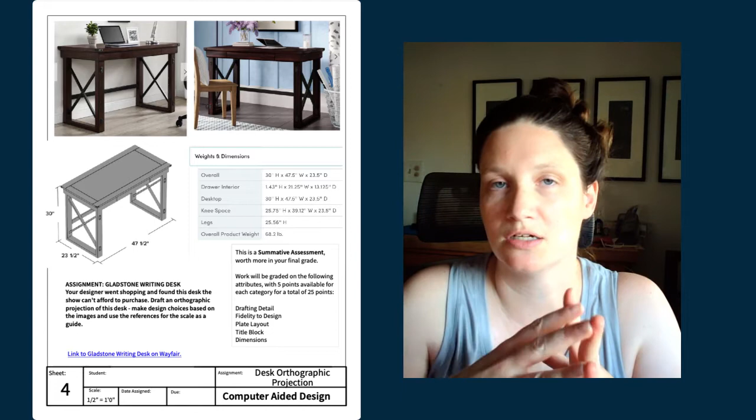In this project, you're going to demonstrate all of these 2D drawing skills you've been working on. You're then going to plate this assignment onto a sheet for print and include dimensions the way we have done before in previous hand drafting classes. I'll refer you to a previous video about what orthographic projection is and how it works, in case that's something you've forgotten or aren't 100% clear on. That is foundational knowledge we are assuming when we go into this project.

Our first task is to take a look at this assignment sheet. I've made you a little once-upon-a-time for this project: assignment, Gladstone writing desk. Once upon a time, your designer went shopping and found this desk. The show can't afford it for props, but they're going to want you to build it in the shop. So your task, as the technical director or props designer on the show, would be to draft an orthographic projection of this desk so the shop can build it, making design choices that allow us to create a desk that looks just like the one in the picture.

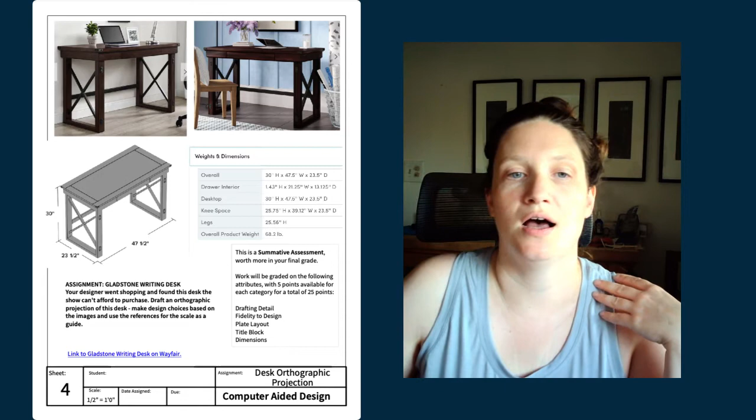Using the basic information provided on this assignment sheet, you should have a hard copy of this; if not, there's a digital copy in the learning management system. Some of the given information includes the overall dimensions of the piece, the size of the desktop, how much knee space there is, how tall the legs are, and overall product weight, which we don't really care about. So we have some basic dimensions, and we also have this little 3D sketch to help us get more clarity about the construction of the desk.

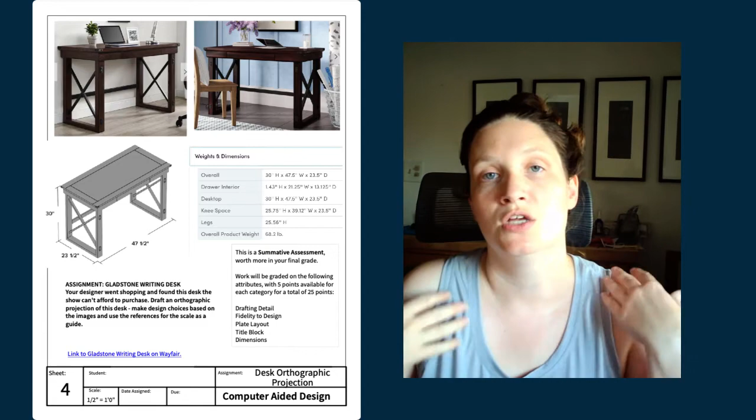What I'm going to have you do is take that information and turn it into an orthographic projection with three views: a top view, a front view, and a side view, so we can send it over to a carpenter in the shop and they can build it.

I want to point out the rubric categories for this assignment. I'll be grading on drafting detail, how thorough you are in the detail of the piece; fidelity to the design, how close it would come out relative to the project design; how you lay out your plates on your print layout, meaning aligning your top view, front view, and side view the way we did in hand drafting; whether your title block is complete; and your dimensions as you add them to the final layout. That's what you're graded on for this assignment.

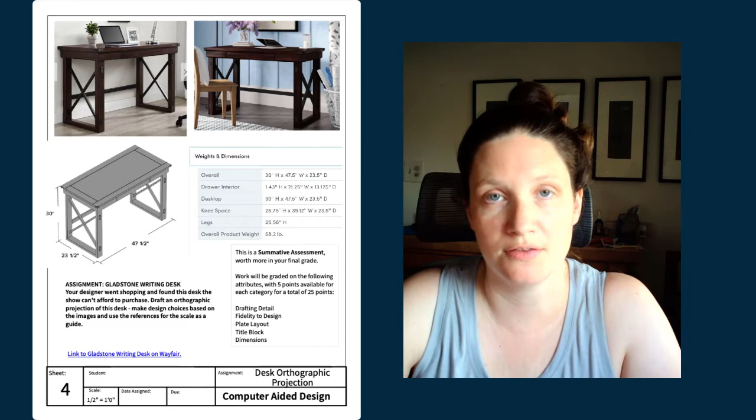Let's get started, okay?

Back in Vectorworks, let's get all up in there. Let me make sure I have all my windows inside of the bounding box. Here we are in Vectorworks, we're going to start a new file once again, use our template, click OK, get it started. Immediately we're going to save it so we know we're getting our backups. Let's call this Bartenstein, 2D desk, because you'll be doing a 3D version of this later. Okay, got a nice blank sheet. Make sure I'm on that scenery layer, and I am. You can also see that over here in this top drop-down, that's our scenery layer.

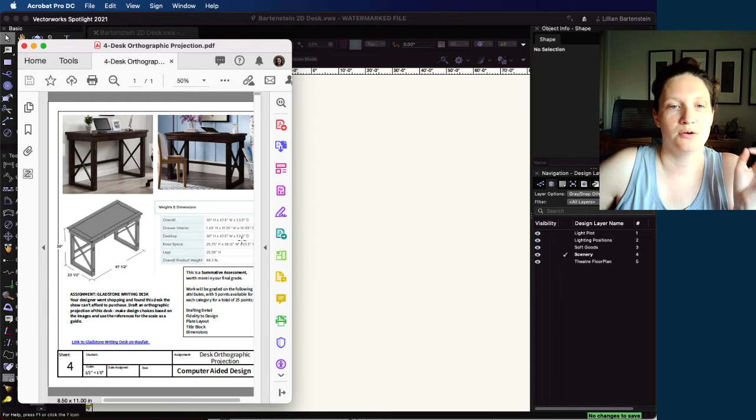As I look at this desk, I'm going to pull it into the frame so we can be on the same page and point at some things. The first thing I'm going to do is my top view, which is pretty easy because I have dimensions given for that desktop: it's 30 inches high, 47.5 inches wide, and 23.5 inches deep. So for the top view, it's a rectangle that would be 47.5 by 23.5.

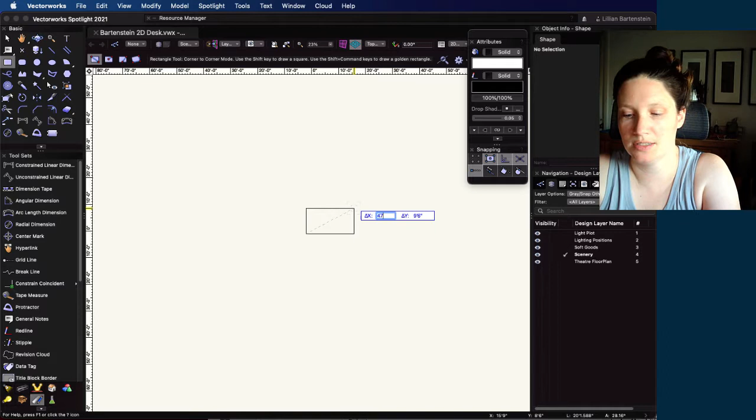So I'm going to start with that rectangle. I pick up my rectangle tool - you can also click the 4 in order to grab that tool. I like to make sure I'm close to the 0, 0, and then let's type that in. So my numbers were 47.5, hit tab, and 23.5, tab. Okay, so I'm obviously very far away.

We're going to click to lock that in, and now I have my top view of the desk. When you do it, you'll probably pull in some of these details, put some of those top edges in, but for expedience we're going to skip that. You can do that on your final project when you do this assignment.

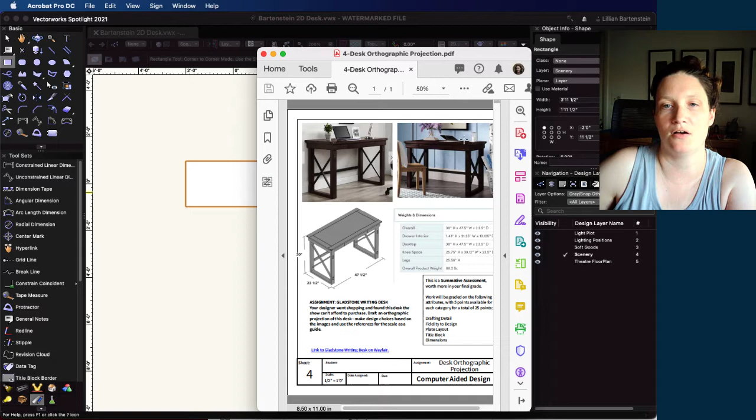So my next task is going to be to do a front view of this desk. I want to look at this front face and try and get all of these details together. So the way I'm going to start that project is I'm going to make the rectangle that this front view is going to fit in.

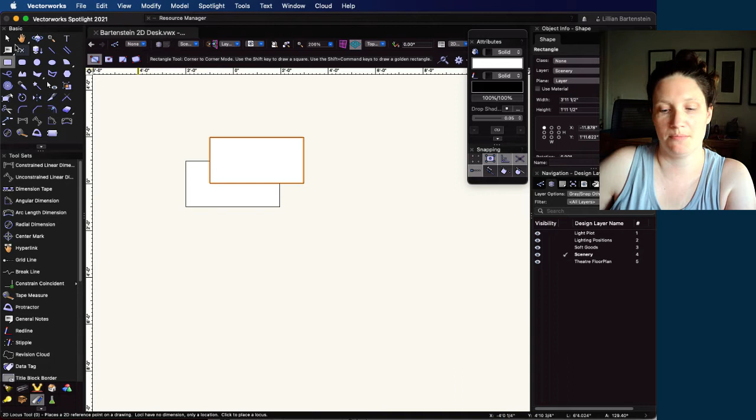Let's start then by duplicating my existing rectangle, Command D, picking up my X key so I'm out in space, and then doing very much what we did before when we were hand drafting, where I align it and then I'm going to move it. This is a new keyboard shortcut for you, Command M. It allows you to move a selection by Cartesian offset, which is super useful.

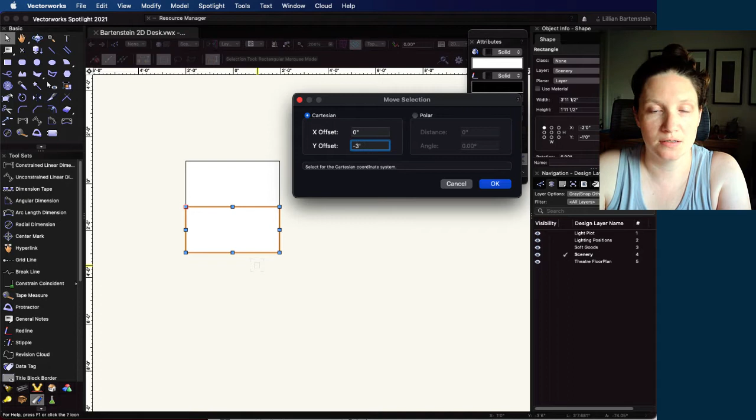So I want to leave the X where it is, I want to change the Y. Let's move it down like 3 feet, okay, give myself some space to work with. And then I'm going to actually adjust the height to be the height of the desk, which is 30 inches. You'll see that in here, right? 30 inches is the total height.

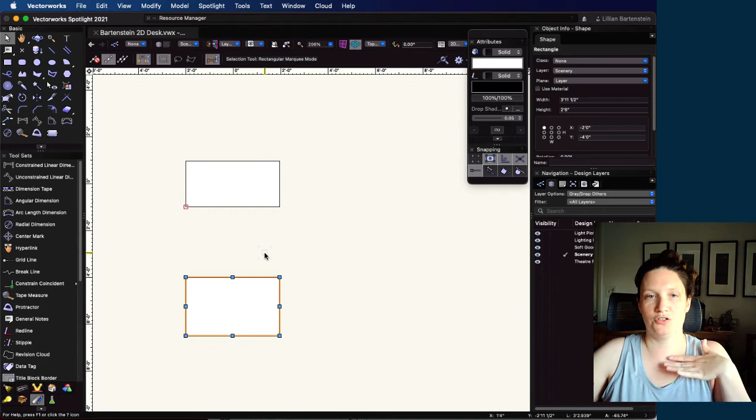That would be the height of this exterior rectangle that we're just using as a guide right now. So I can do that in object info over here. So my width is still that, my height, I can say 30 inches and hit enter, and now this is the height matched to the total height of the desk, okay?

So the next thing I want to do is start putting in some of these details. I'm just going to be doing estimates, you do you, in terms of drafting this front elevation. So I'm going to start with the desk top.

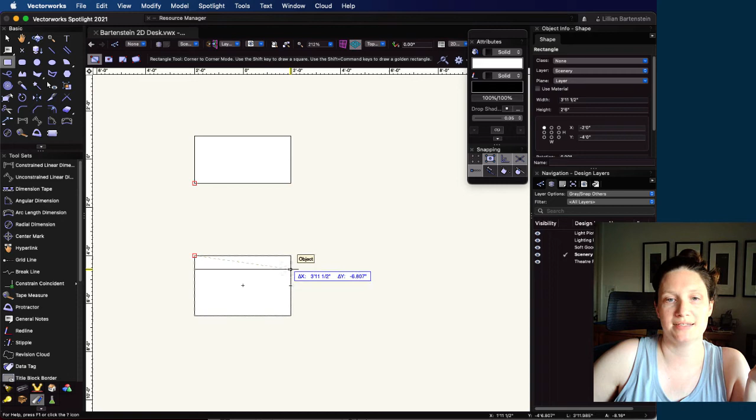I clicked into this corner with my rectangle tool. I now can snap to the object - that'll give me the X, and then I can type in a Y. I don't think that desktop is more than 2 inches thick, so I might say -2 inches, enter, click. So there's that desktop. It looks like then the frame is sitting in underneath it by a little bit.

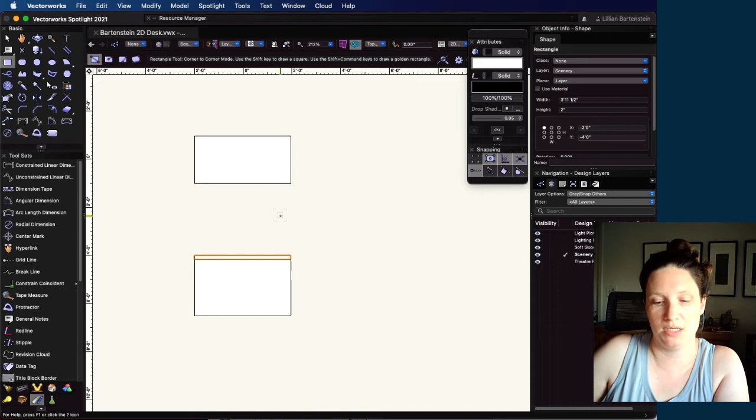So maybe what I would do to get that frame is, again, duplicate, Command D, grab my X key, pick this up by its center point, and then do some adjustments on this shape. So I'm going to come over here again to where it has a width and a height. I know this is going to be a little taller than the thickness of that top desk, so maybe we'll call it 3.5 instead of 2 - actually, maybe just 3 inches is better.

And then I can do something here where I move these little dots - that's your anchor point. If I move this dot to the center option and then I change the width, I can have it automatically shrink inwards to give us that inset under an overhang. So I think I want to just subtract like 1 inch in each direction, and Vectorworks will do that for me. I can just say -2 inches, and now it contracts in underneath. So there we have that overhang is exposed.

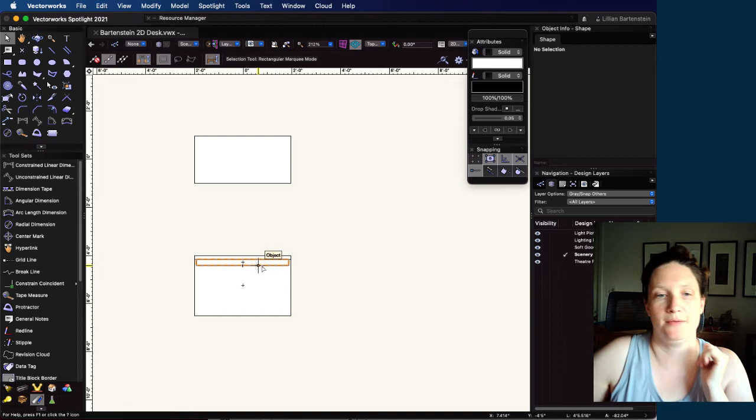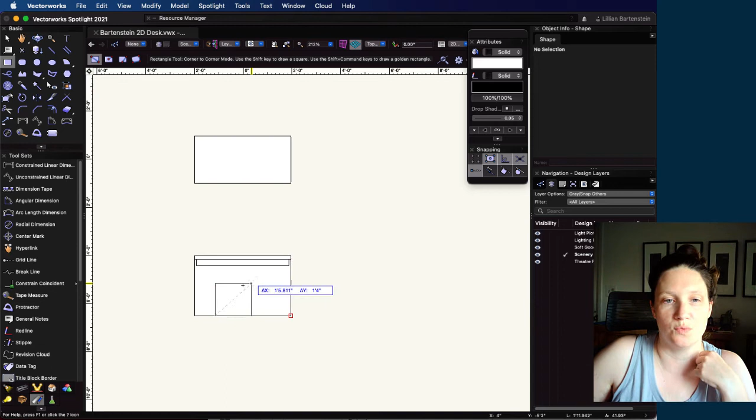You eyeball it, see how you feel about it, see if you feel like the desktop is too thick or this is too small, whatever. If you want to be specific, you can create that rectangle for the knee space, which is 25.75 inches high. So we can do that as well if we want to, where I leave the X like who cares and I say 25.75 - that gives me an accurate knee height. So then you can adjust these rectangles to fit above that knee height if that's something that you're interested in being precise about, which it is. It's a good thing to be precise about.

So then the next thing is this opening, this width underneath.

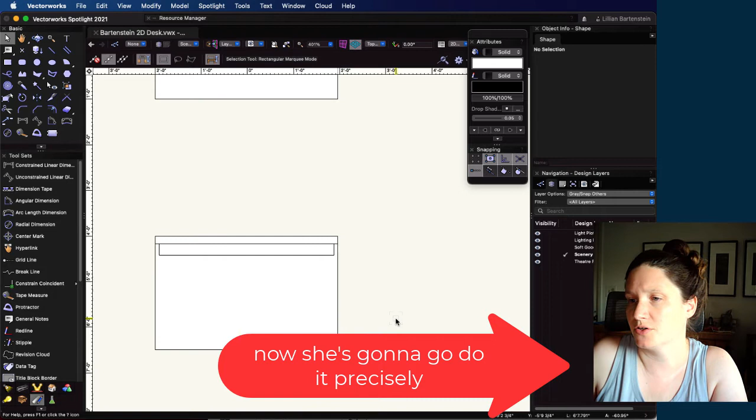Maybe we go with that knee height situation. We can use that knee space measurement to figure out how this all lays out. I'm gonna come back in here, Command Z, get that box back, make it the correct width. The width we're looking for is 39.12, for some reason. Let's see what that looks like.

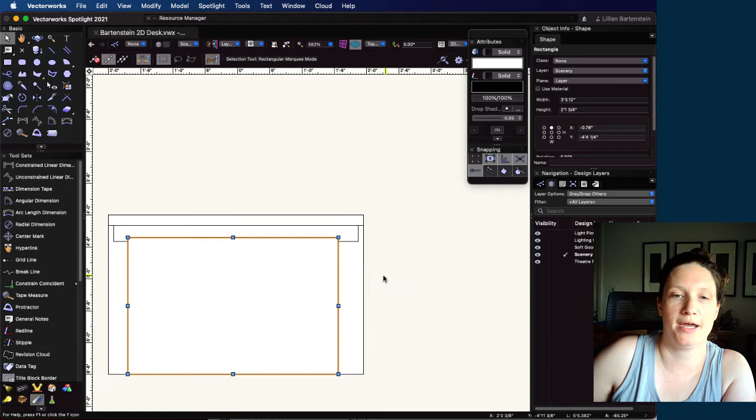So that gives us a good marker. Again, I can pick it up by this bottom center and snap it to the bottom center. Now we know we're symmetrical, and maybe then use these edges as guides. I think I might shrink, let's move this box, make it a little bit narrower, minus a half inch.

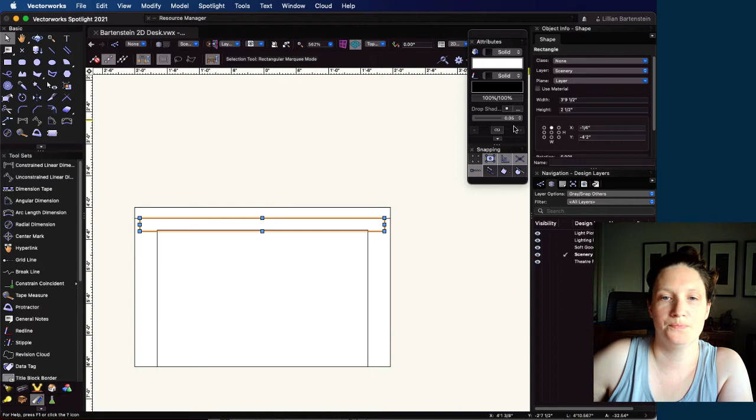Great, and make this distance, let's see what we're looking at here. I'm just using my measuring tool, it's like what, a quarter inch, great. So maybe I'll just make this top one a quarter inch thinner. Then I can nudge this up. I can move, X offset 0, a quarter inch up, and now that knee space is correct.

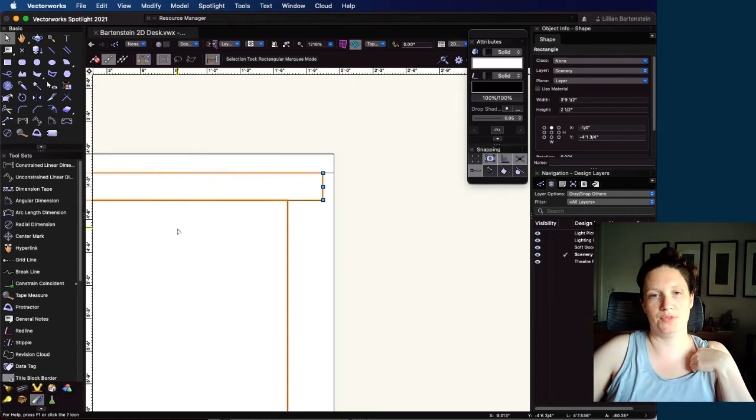Then I can grab a rectangle, pop it in here, get that side piece set up. I'm again gonna highlight over this until it turns red, and I'll be able to snap to that width.

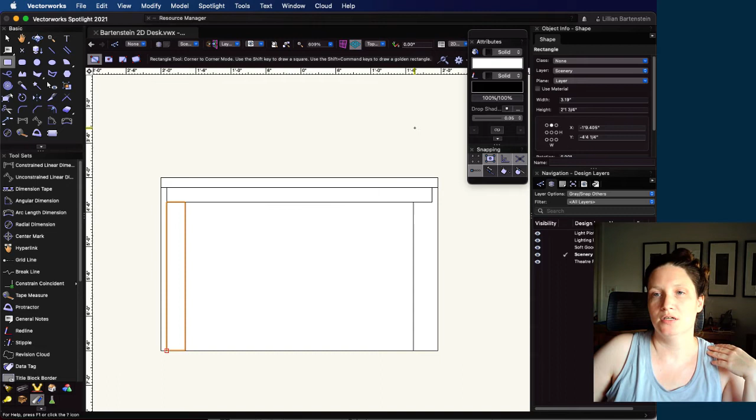I think those legs are actually inset underneath. So instead of this given width of 3.19, I'm gonna just anchor point myself over here, and we're gonna call the width 2.75, or 2 3/4 inches.

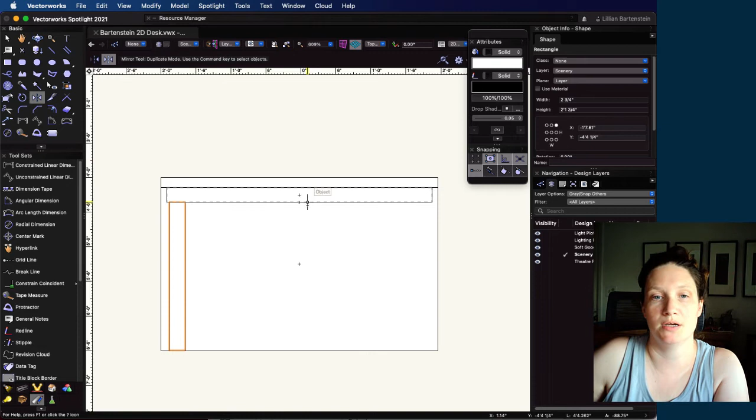I can now delete that. I can mirror this across the center using my mirror tool. Oh, that didn't work. Let me get my mirror tool right.

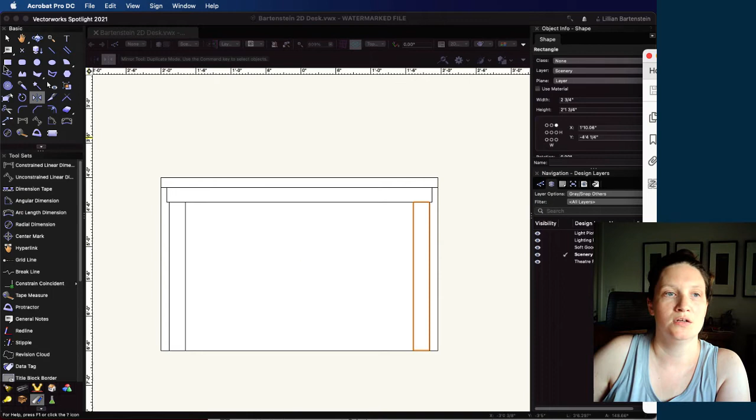Then the only other thing I might see from this front view is this cross piece in the back, so we're gonna see the cross piece going across the very back. If you wanna draw in where that drawer is, you're welcome to do that as well. Let's just give us a rough estimate for where that cross piece is. I think it's a little bit lower than the center, and I'm again snapping to the object, so I don't need to change the X dimension. I'm gonna make this also 2 inches.

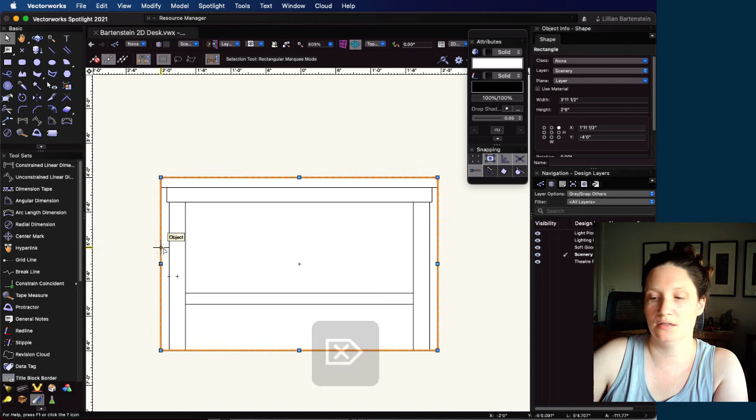So that is now a front view, and I can just delete this bounding box, and I have my front view of my desk. So top view, front view, and then lastly, we'll do a side view. I'm gonna just move this back up like a foot so that I have a little bit more space on my screen. One foot, great.

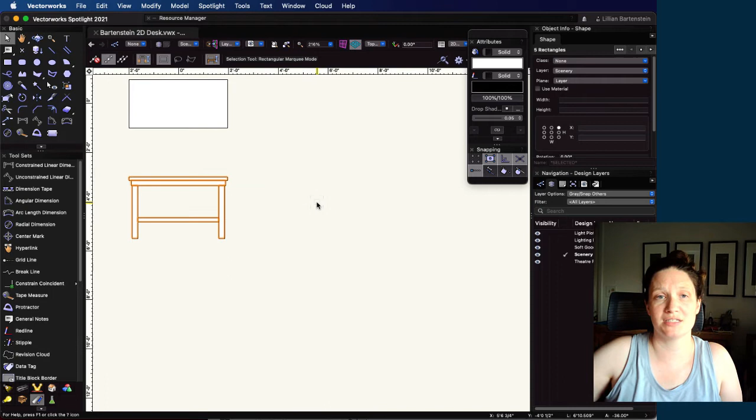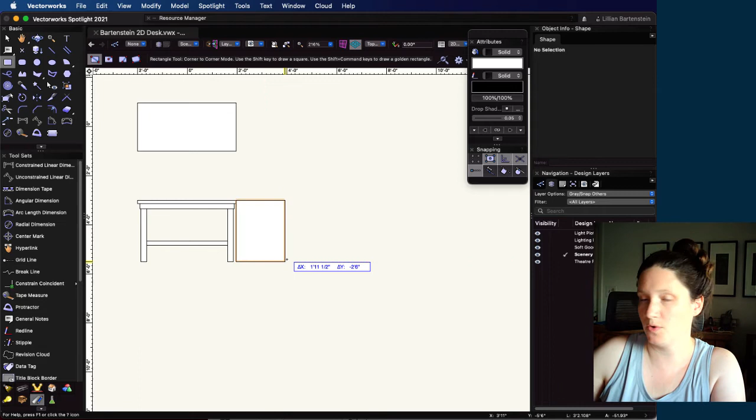So now side view, very similar strategy with my side view. I'm gonna take my rectangle, I'm going to start at that height. I'm gonna highlight over the bottom to get the bottom height, and then I know my change in X is the width, which is that 23.5 from before. Click there, move it, 0 now on the Y-axis, 2 feet on the X.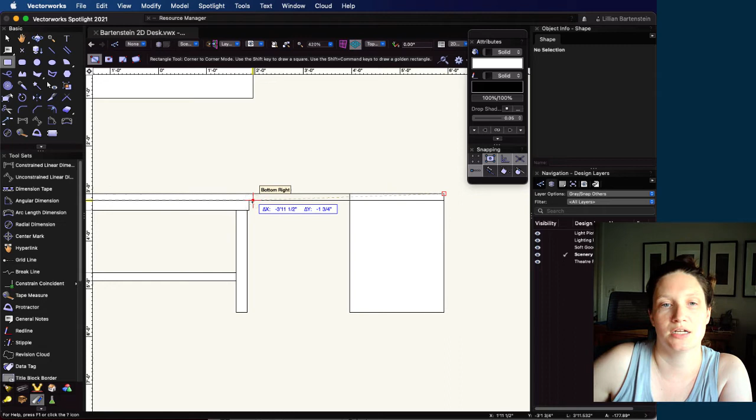Pop it over here to the side. I can now use all of those same tools that we'd used in hand drafting, but I'll use it with the snapping and the smart points. So I need a rectangle that's gonna fit to that height. I hover over this little corner until I get a red box, and then it'll let me object align vertical to get that height.

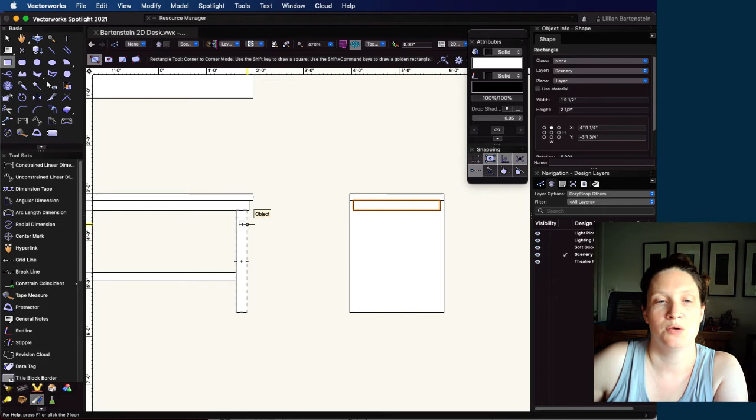Same idea here for the bottom, so we're gonna go ahead and make it the same height. We're gonna play the same game we did before, which is just subtracting 2 inches from the center here. So we're back to the width, and we say minus 2, and it will shrink it in just the way we wanted it to. We're then going to do these legs, very similar way.

So I'm gonna just create the leg. I know it was, what, 2.5 inches before. We can even copy paste it if we want to. I think they look relatively square, I don't know, you decide. Maybe it's only 2 inches or 2.25 inches. So if I wanted it to be 2.25, I could just type 2.25.

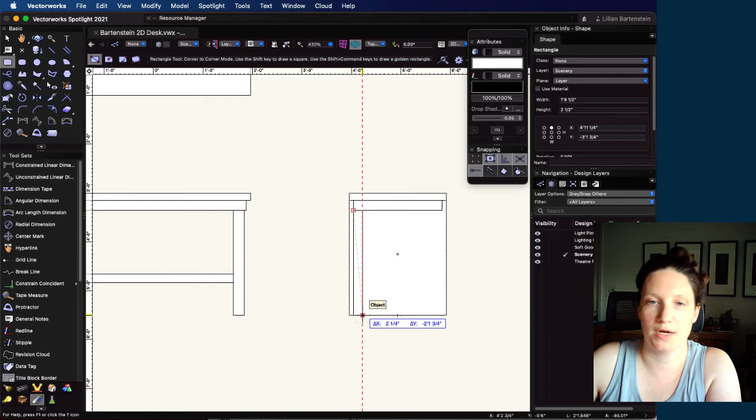Maybe it's a little thinner, there's a little bit of an overhang here. How much was that? I don't know, let's find out. Half inch, great.

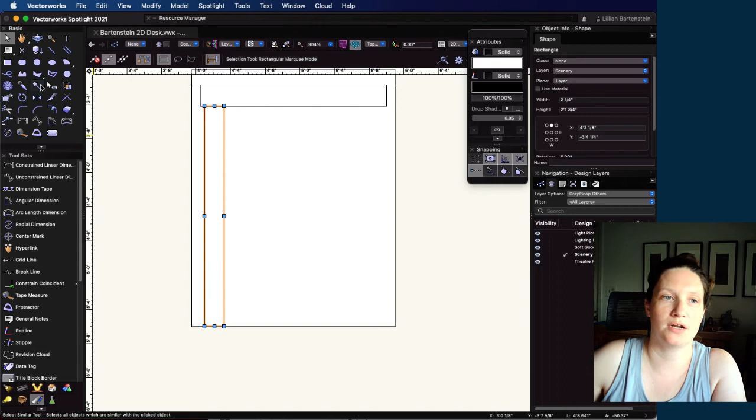Delete that measurement so I can then move it, Command M, half an inch, or Control M on a PC. X offset 1/2, enter, great. Mirror that across - I'm just building out as I go, okay?

Then I'll do the same thing on the bottom for that bottom cross piece. Make it maybe a little bit thinner - it looks like it's not quite as thick as the leg. So maybe instead of 2 1/4 or 2 1/2, it's only 2 inches, okay?

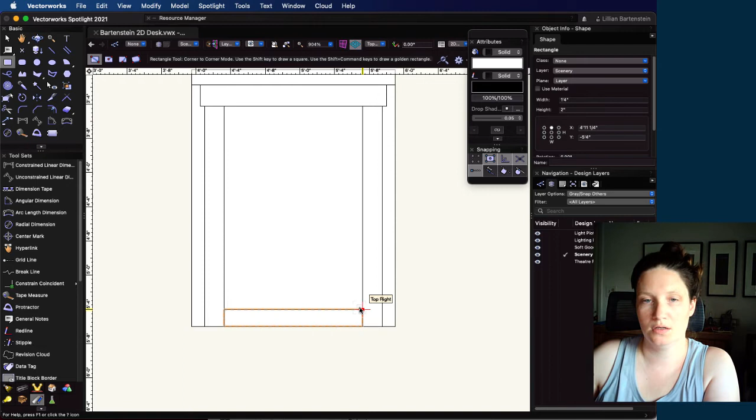That gives me the bottom piece, and the last element of this side view is going to be that cross, that X. I'm going to just delete that background rectangle. So now I just need that crisscross X for those cross bracing pieces, okay?

There's several ways you can get there. One of them is going to be to use this mode of your rectangle tool, the 3-point rotated mode. So I just want to show you how that works.

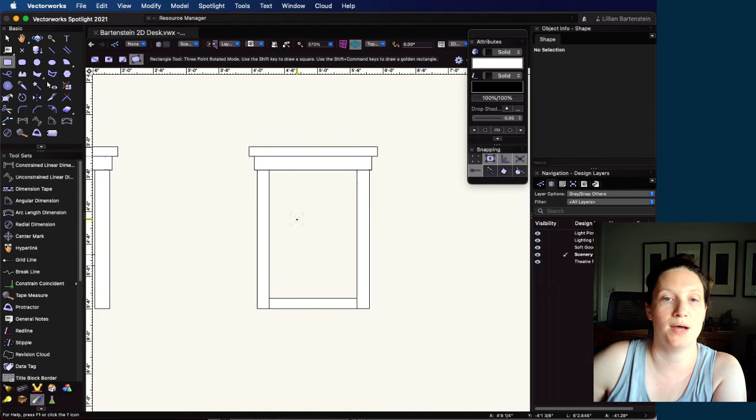We're going to start a little bit up from the bottom, and go to a little bit down from the top - this is all an estimate. If you wanted it to fit perfectly, you could draw a rectangle inside of this rectangle. So I just give myself that kind of situation.

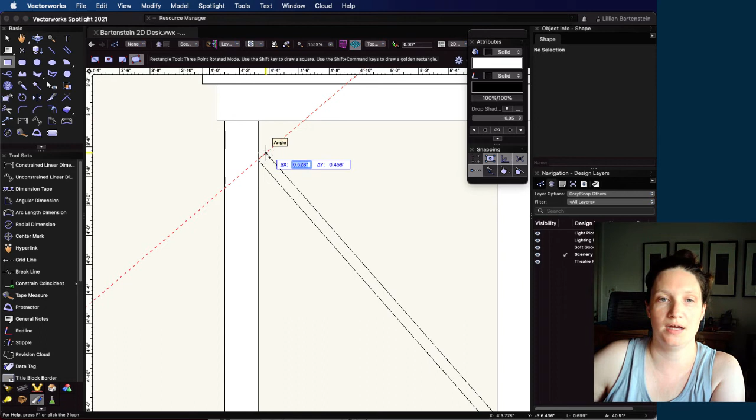And then I can say like 1 inch, okay? It actually gave me not quite an inch, so let's say it's an inch. This will give me now an ability to move this rectangle around.

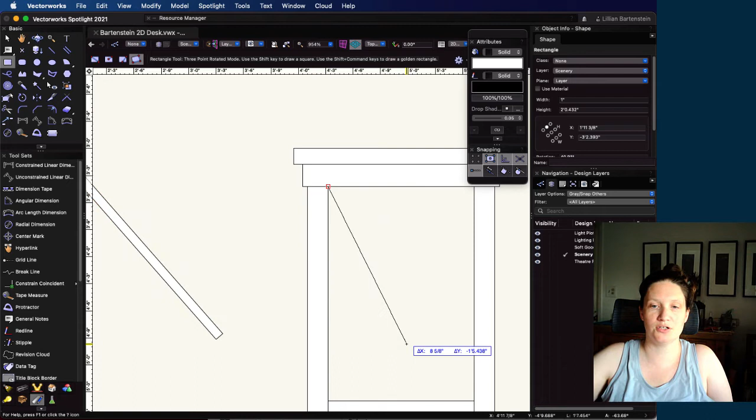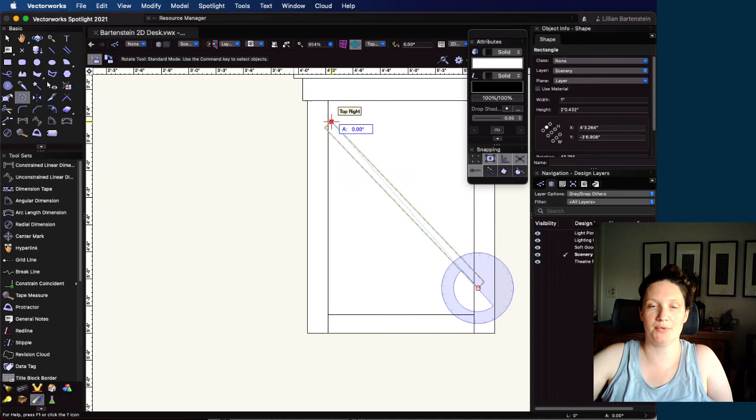I think the best way to get it perfectly centered is going to be to draw another rectangle here. Grab this rectangle I've created by its center point and snap it to the center point of this void. I might even grab my rotate tool and rotate this so I'm clearly overlapping, and make sure I have my centers squared up.

Yeah, great. So now I can get rid of this one - I have that guy, beautiful, great, wonderful. It might even still be too thick, so maybe instead it needs to be 0.75. We can see how that does for us, see when it looks correct.

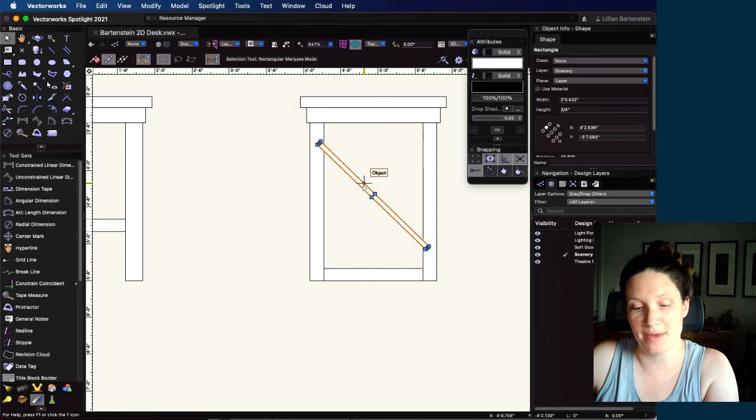Once I have it in place like this, I have a couple of options. I'm going to probably send it to the back - Command B, send it to the back. Select these two guys who are on top of it, modify, clip surface - that's going to trim off those extra edges. So now it's just this deal.

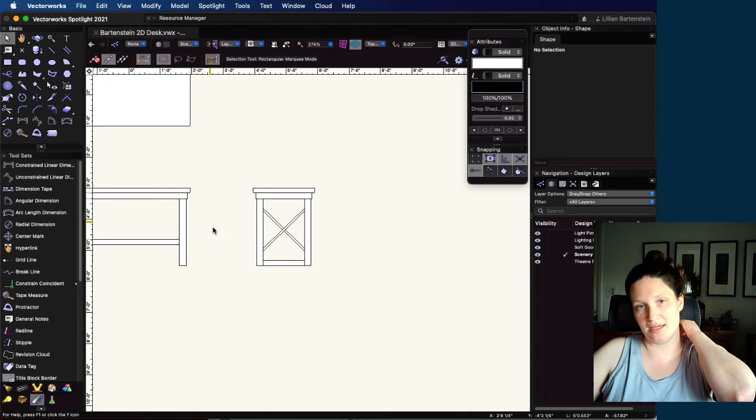And then I can mirror it across that center line because we have it placed where we do, and now I have the X in place, okay? So that is my first step, which is drafting this desk.

Now that I have a drafting, I want to plate it. And I'm going to do many of the same steps we've done before. I'm going to use the 11x17 sheet as my elevation plate. So let's review the steps.

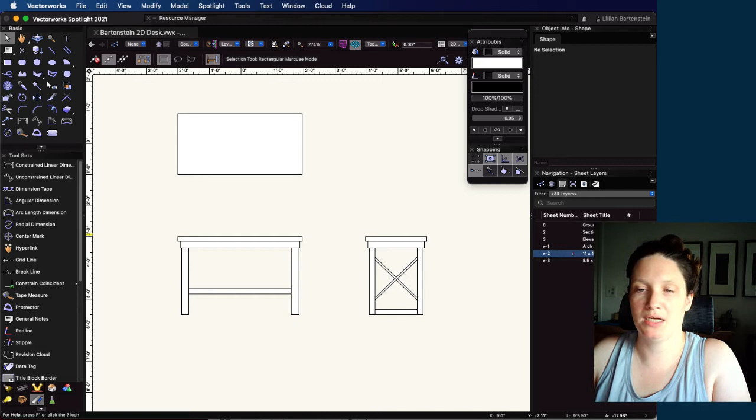We want to come over here. We want to say, hey, 11x17, you're going to be the one I need. We're actually going to delete the sheet number for the ground plan because I want to use this as my plate 1. I'm going to duplicate it so that I still have it if I need it later. We're going to call it plate 1.

We're going to call it 2D, or we could call it the Gladstone desk elevation. Great, and grab it, bring it up to the top of the stack. Okay, so blank sheet, Gladstone desk elevation, brilliant, wonderful.

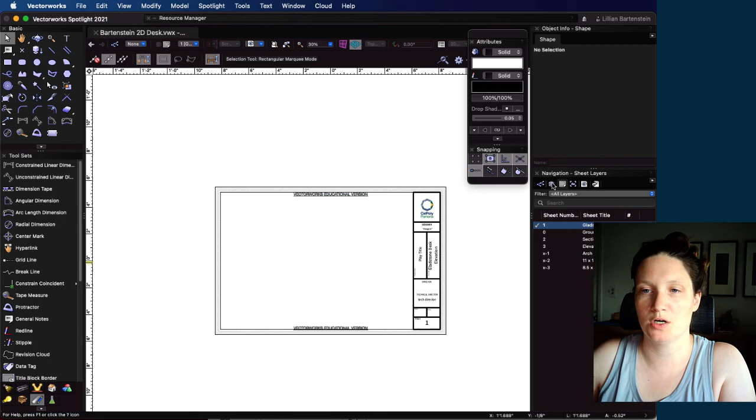Coming back over to our plate, the first thing we need is this top view. I'm going to do it the second way that I was showing you, which is to draw the rectangle for the crop first, because I do want a separate viewport for each view of this desk, okay?

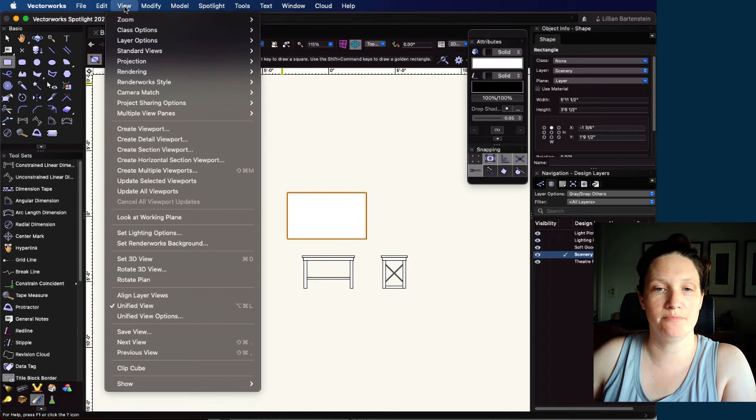So that's my first one. I'm going to create that viewport. Yes, please. Great, this is top view. We can make this a little bigger. So there's our top view. Oops, I'm still drawing rectangles.

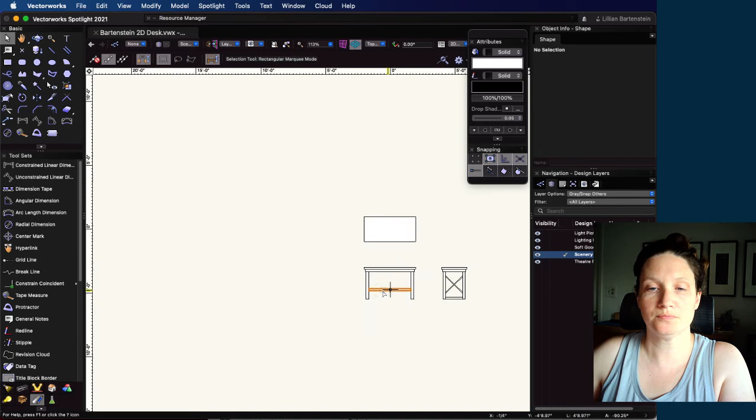Great, come back over to my scenery layer. Let's do a front view, right? So again, I can just grab a rectangle, draw it around there. View, create viewport - okay, front view.

Yeah, 1/2 inch scale, please. Thank you. Okay, so there's a front view.

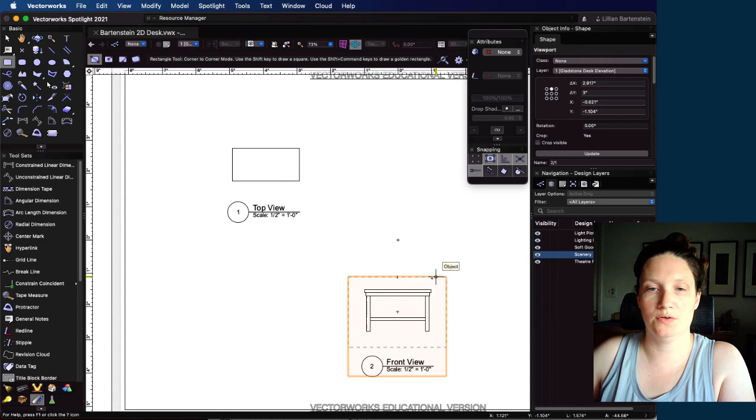I do want them to be aligned the way that we play this game when we do orthographic projections. So in order to do that, X key, I want to grab it, hover over, and then I can align it vertically, right? So now they are aligned, and then I'll do my last one, which is the side view.

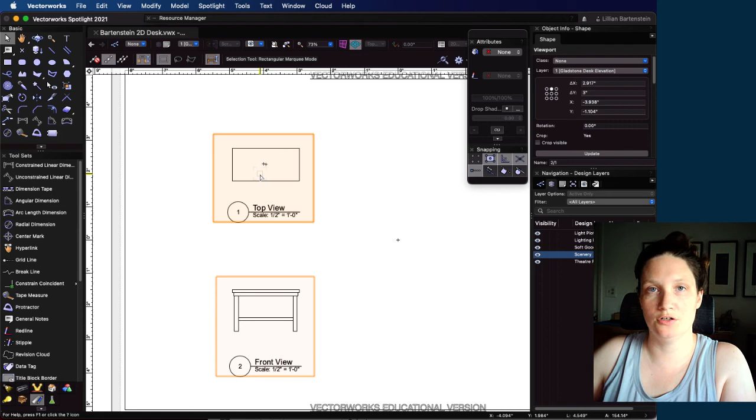I'm going to do it a different way. So instead of creating a new viewport from my design layer, I'm actually going to duplicate this existing viewport. I'm going to match it all up to its current location, double click on it, change the crop.

So I'm going to just move the crop over to the side. Need to move my attributes out of the way so I can exit the crop.

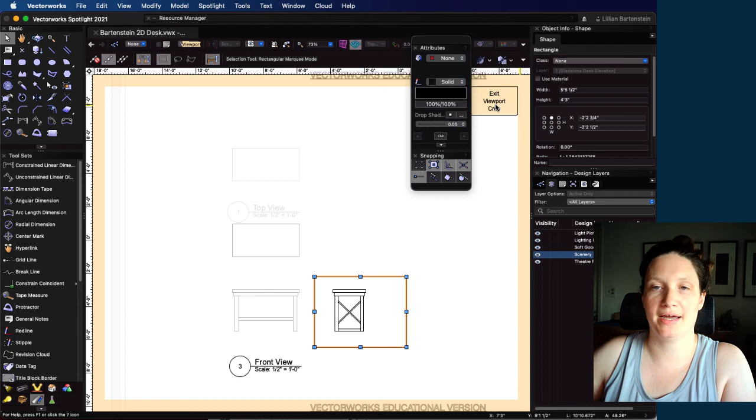Let me move this guy over. This time I'm moving in actual inches, so 3 actual inches moves it across, right? And that may be too far, but we'll get there in a second.

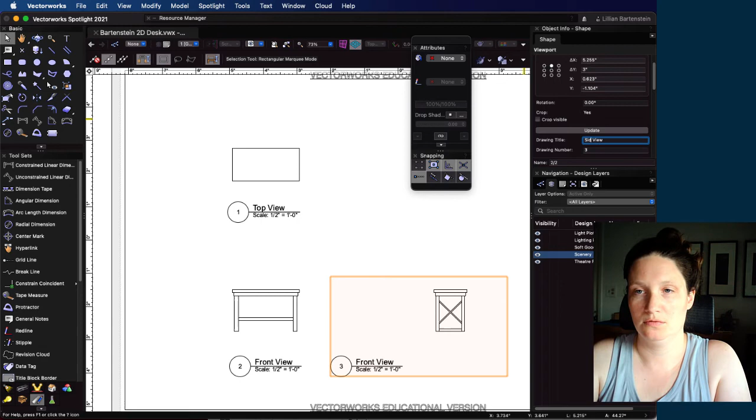You can change your drawing title right here in Object Info if you want to, and you can also come in and adjust your annotations. So we'll slide that over there. Okay, so those are my 3 views.

That was step 1 of this game, right? I've left a lot of space around them because I know you're going to come in and do your dimensions, just like you've done them on orthographic projections when you were working in hand drafting.

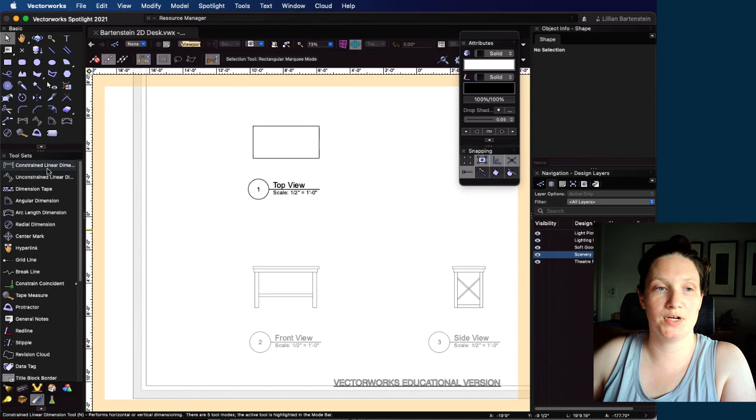So once we come into dimensions, the one that's going to be your friend is this constrained linear dimension. You're going to grab each point that you need to dimension, and you can pull them out.

I have set up the template file to do your dimensions in blue. However, you may or may not like the look of this dimension style. I'm going to tell you right now, it's not my fave. I really like the ASME dimension. That looks to me more like a theatrical dimension.

I'm switching them right over here in the Dimension Standard tab, but you can also do it as you draw. So if you go to Dimension Standard right here at the top, you can switch yourself into ASME, and it will allow you to do those dimensions.

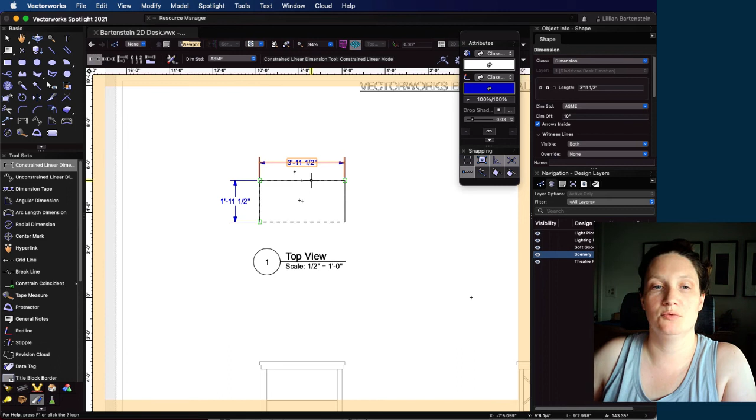Now, this only really works inside viewport annotation, because if you're not in your viewport annotation and you start pulling dimensions, it's going to be in actual big inches, not in scale. So you have to be inside of that viewport in order for your dimensions to come out in scale.

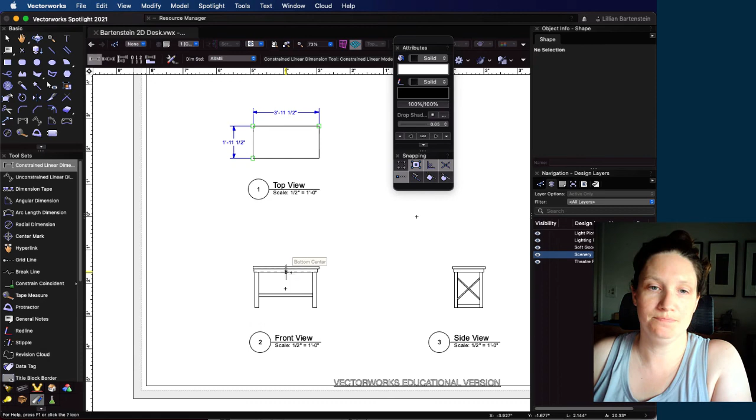If you are, let's do one more quick little troubleshooting. Let me hit my X key, inside of a viewport, here's a good example. I'm in this viewport, I need to do some itsy bitsy tiny dimensions, right? There is not enough space to do this here. If I do like that, that 1 3/4 dimension is bonkers, I can't read it.

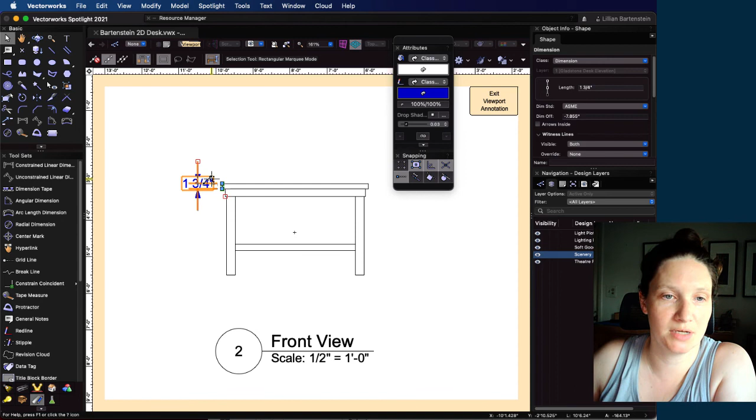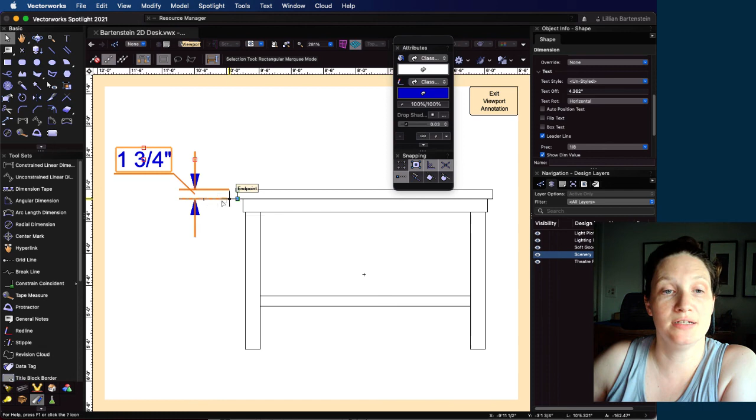If you get your X key, after you've dropped that dimension on, you can zoom in, you can grab this dimension itself, pull it out, like you can grab the actual text. You can pull it out like this, you've got your arrows on the outside, that's cool, and then you can come down here, scroll down in Object Info, and you can ask it to place a leader line for you. So now it allows you to point to that tiny space with that dimension so that you aren't trying to cram too much stuff into one space.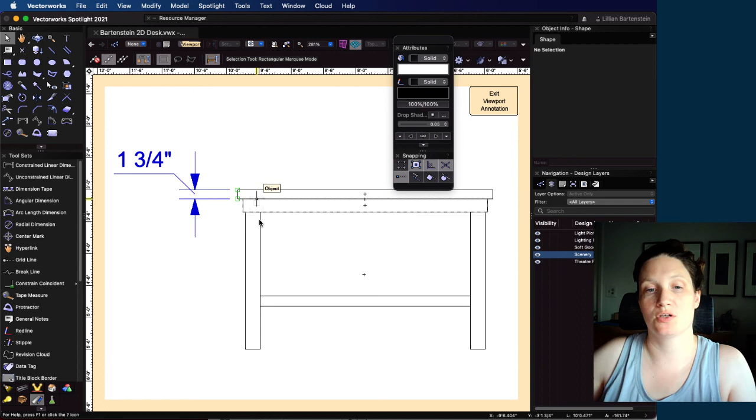On this front view, especially because there's a lot of little bitty dimensions, you want to make sure you're arranging your dimensions as efficiently as possible so that you have space. You also want to remember all of those rules about dimensioning that we had previously. So you want to think about dimensioning from the smallest things out to the biggest things so that your leader lines aren't crisscrossing. You want to place your dimensioning points efficiently.

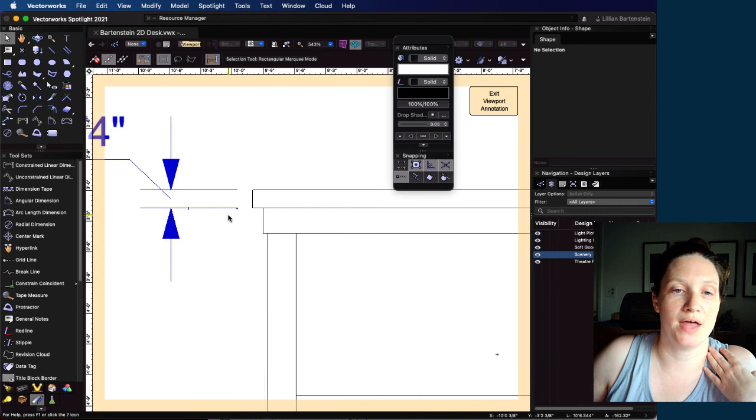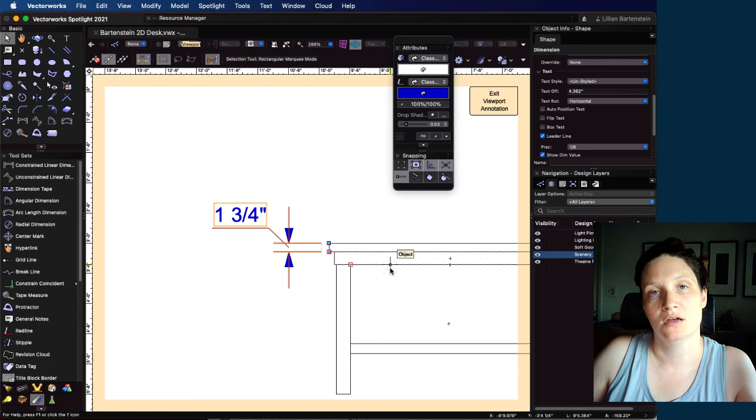With this one, I have this option about where that insertion point is on this dimension. So I could dimension from all the way in here, but then my dimension line is crashing into my object line, which I don't want. So I want to make sure my dimension line insertion points are at the outermost corners of things, unless there is a reason why it would need to cross an object line. So these are just like going back, remembering those dimensioning skills from previous classes, and applying that in this assignment.

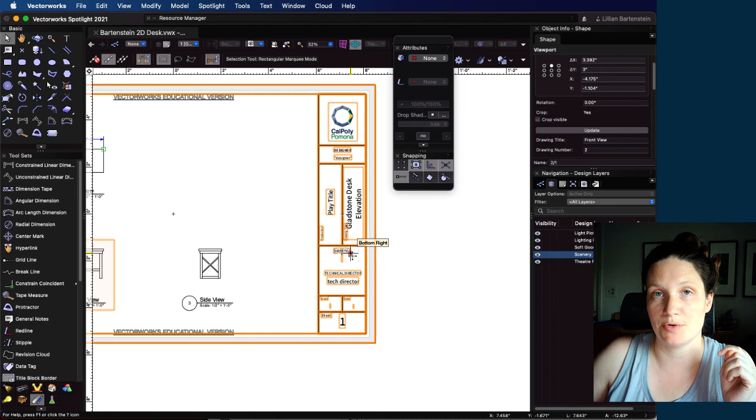So you will then, after you do that, go in and follow the same steps that we did previously to complete your title block. So that'll be just the way that we did for the door project and the logo project. You can go in, update your title block to include all of the relevant information, make sure your scale and date are in there and are correct, and export a PDF of this file to submit as your assignment.

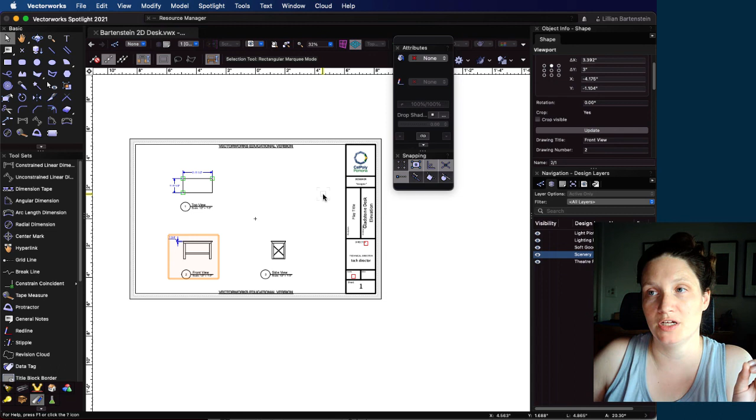So that should be everything you need to know to draft this orthographic projection of the desk. But if you have any questions at all, let me know, reach out. I'm happy to help you out and make sure everything is all squared away in your 2D drafting so we can move into the 3D next time. All right, thanks friends, bye.